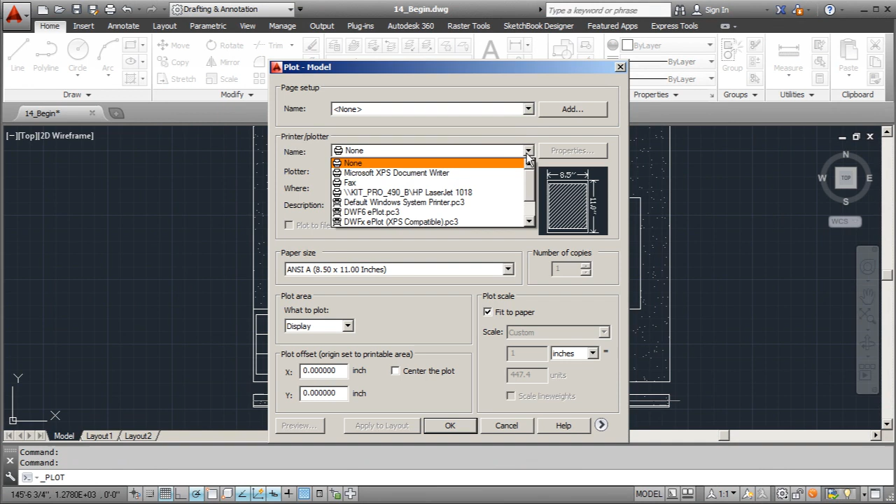So I could see I want to make a few adjustments here. I mean, some of the adjustments we've made so far, like darkening these lines, have been some really good decisions. Adding a little hatch pattern for our grass. But you could definitely now see the benefit of checking your drawings as you're going, so you know what it's going to look like as a finished product, and you're not going to have any surprises once you hit that print button. So what I'd like to do is darken up these dimensions.

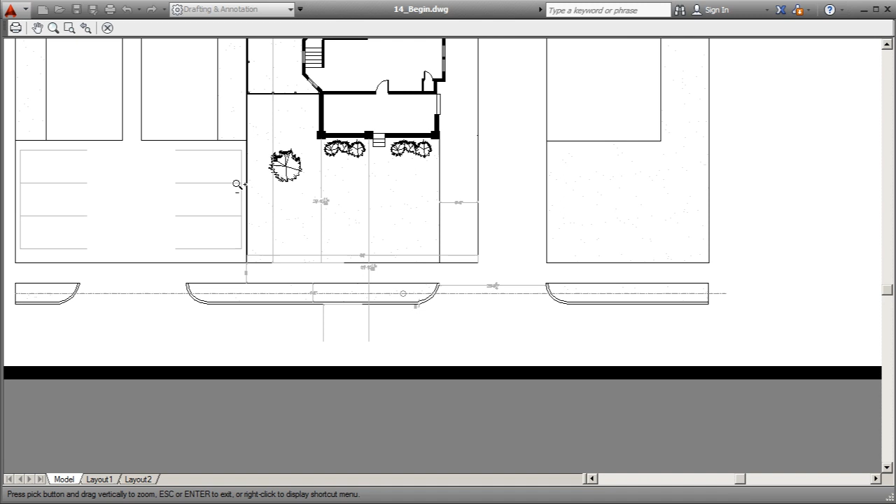The dimensions are very important. They're going to tell a story. They're going to tell everything that we need to know that's going to be really important about our project. So we're going to do the same thing for our parking stripes. So anything that's gray, I can see that gray color really isn't working too well and it's not going to read. So I'm going to go with darker lines, but I am going to be very careful to manage my line weights accordingly. So let's get that accomplished.

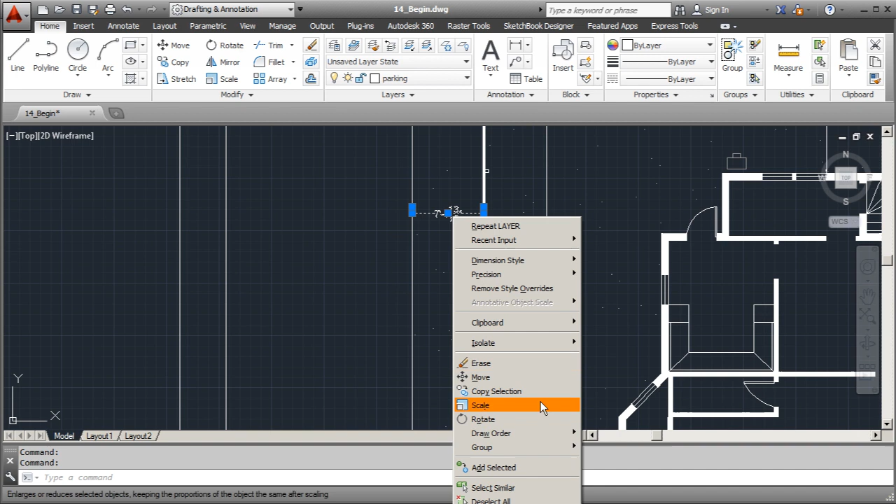Let's jump out of this. And I'm going to add a layer strictly for my dimensions really quick. So we'll add layer. We'll go dimensions. And I'm going to keep it white. And we'll say there. Bingo. And now I'm going to select one of my dimensions, and I'll right-click, and I'm going to select similar. I should select all my dimensions, and I'm going to go to my drop-down, and now let's assign those to that layer there. So it looks like, as I mentioned, we can make some more adjustments.

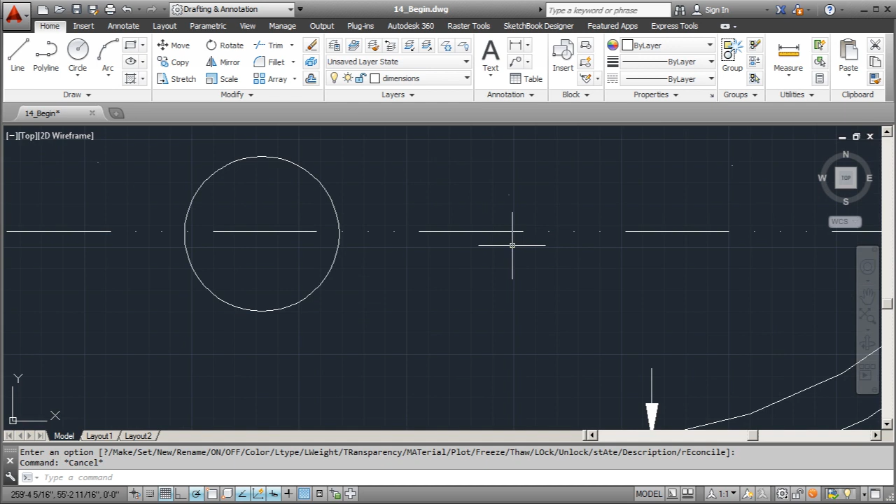So let's adjust what's going on with these guys. So that's my water main. So we'll come in here, and we'll assign that to the white color. Looks like it took care of that as well. And we'll do the same thing up here towards the back, because we definitely want all this to be very visible. We don't want any question about what's going on in the back. So I'm going to select that's going to be my sewer main. We'll set that one back to white color as well.

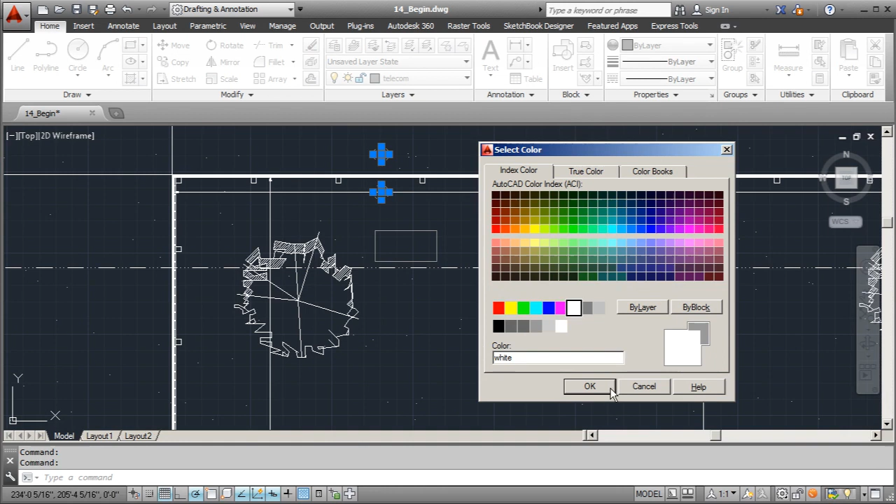And we'll do the manhole cover. And then, oops, don't want to do the 255. It'll actually show up almost like a gray color. We'll do these last few utilities here. Actually, we can go down this way. We'll assign white to it. Perfect. And we'll get our one here. I always do that. Let's go back to our drop down and take care of that one. So assign white to that as well.

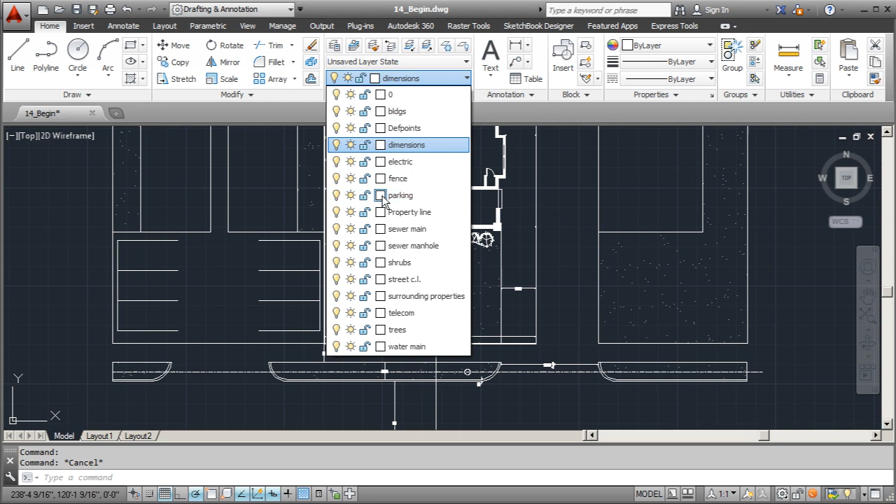So now I should be able to go to my plot preview, take a look at what we did, and things should read a lot better. I'll do the same thing for my parking stripes here. Let's adjust that layer. I think that's on a 255 color, and that'll show up, yeah, as a grayish color. So what we'll do is we'll go straight white. Now we can do our plot preview, print preview.

And we'll see how this looks. Oh, that looks a lot better. Reads a lot better, too. There's no question on the dimensions. All right, I'm glad we made those changes. Now, you can definitely see the benefit of checking your drawing as you go.

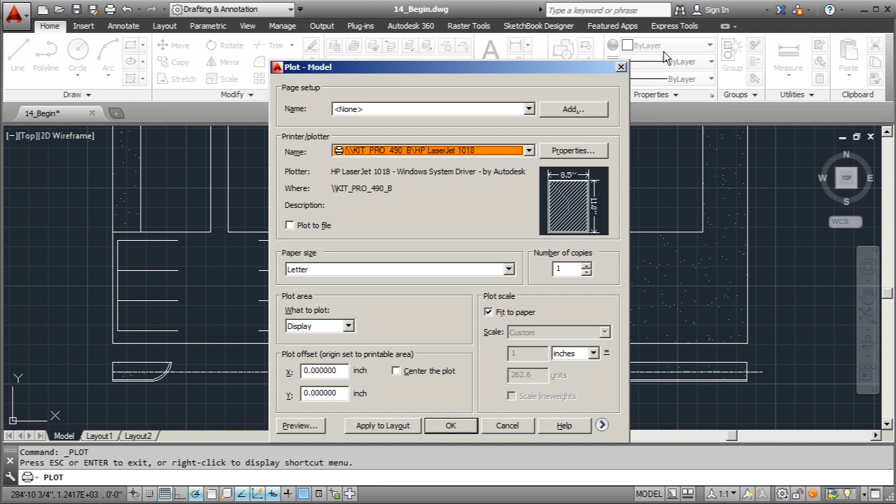So let's add some text to this. So what we're going to do is we're going to use multi-leader text, and we're going to call out all our utilities and any kind of notes. We could probably even, if you wanted to, call out the type of trees you got there. You can make note driveway.

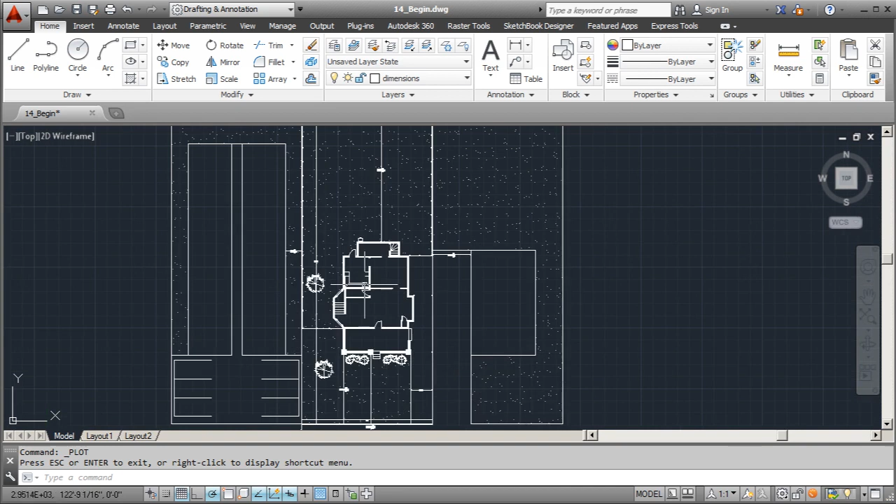If you wanted to, you could put maybe the address in each one of these blocks or the name of the building, depending on the type of project. You could even put your legal description somewhere in your drawing if you wanted to. But I'll probably do that in the title block. But let's go ahead and add some text.

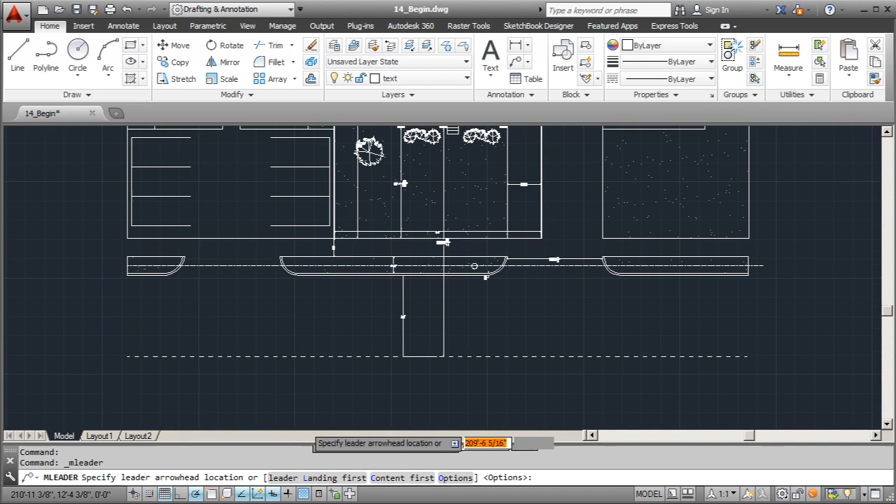So I'm going to create a layer strictly for text. So we'll go there, we'll add layer, and we'll call this one text. We'll make it current, and we'll start with our first one. And I'm going to start here with my street center line. So basically I'm going to click on that guy, and I'm going to type in CL of street, center line of street.

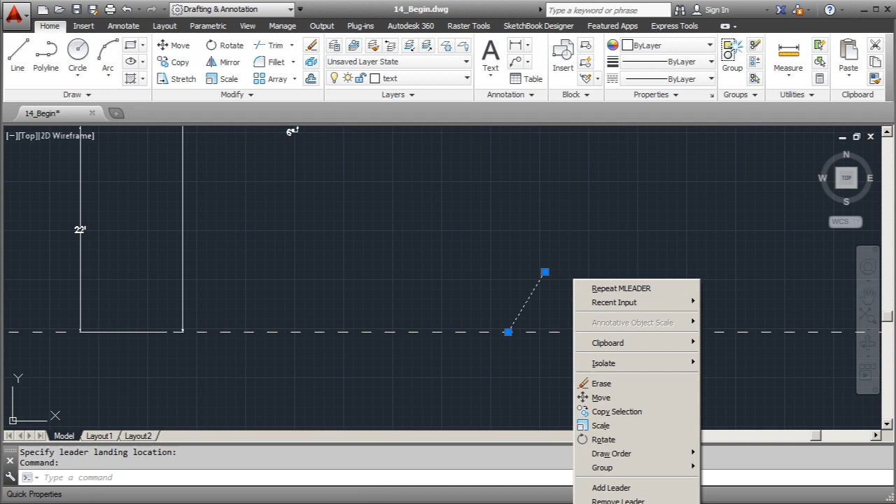And it looked like it disappeared, but it didn't. I just need to adjust some issues with it. So I'm going to right click. Now you can either go to quick properties or properties. Quick properties will bring up a smaller window, but it doesn't have all the information we're going to need. So I'm going to go to the regular properties.

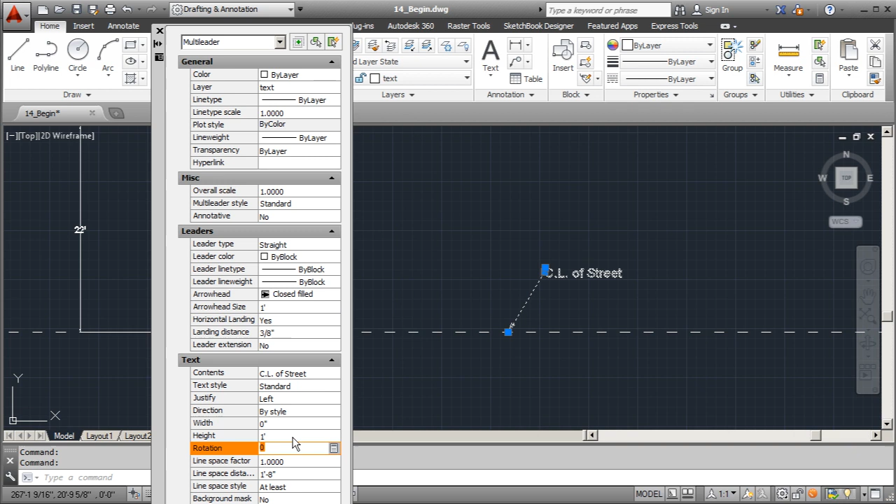And we want to adjust our arrowhead size to about 1 foot. And you can see that change made right there. And I also want to change my height for my text to 1 foot as well. And that looks a lot better. So all I need to do is get out of this window. I'll hit escape once, and you can see that that reads nicely.

So now we're going to take a similar approach, but first we're going to create this as an actual style. So I'm going to select it. I'll right click, and I'm going to go to multi-leader style, but I'm going to save as a multi-leader style, and I'm going to call this one site plan. And we'll say OK. And now I can just use that one when I do anything else.

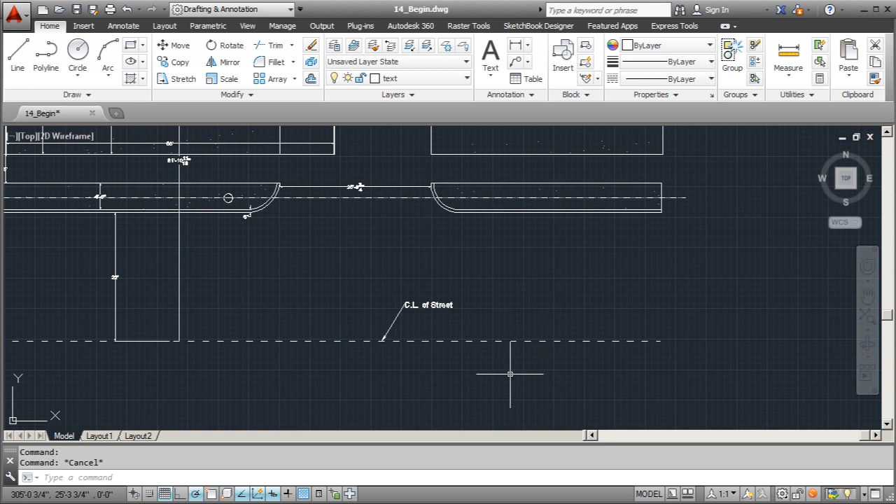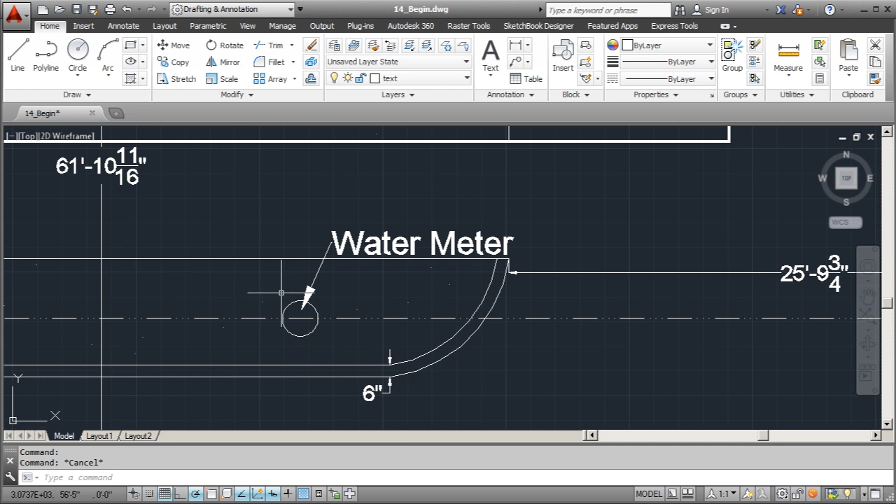So we'll come over here and we'll use another multi-leader. I'll point here and I'll say water meter. Hit enter. Click out of there. It looks like it's small, but it's not. We'll right click, we'll go to multi-leader style, and my site plan should be there, and bingo. That's all we got to do to add text. So let's add a couple more here.

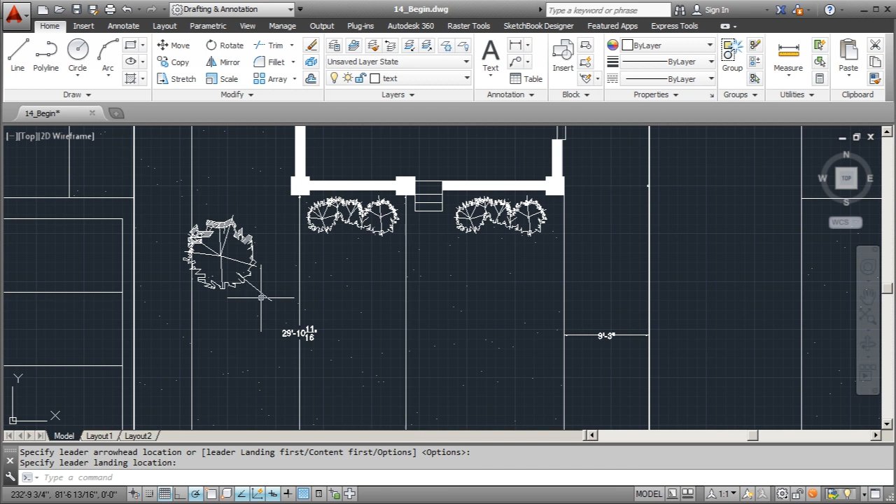We can simply start labeling our trees and shrubbery if we wanted to. You can do that for your landscape. So we'll do the same thing. We'll go multi-leader, come here, and I'll say deciduous tree. We'll capitalize that T. There we go. I'll select it, right click, and we'll go to multi-leader style, site plan, and boom. Perfect. So that's basically how we're going to add text all throughout this thing.

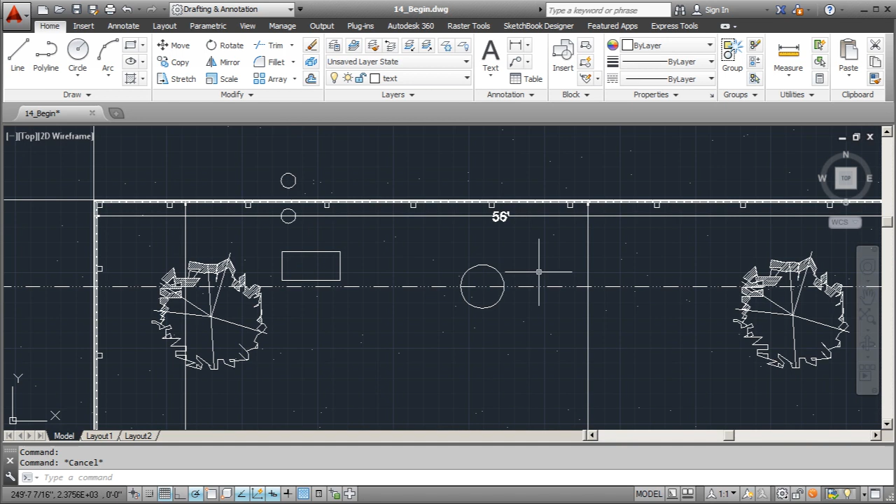And I'm going to basically add text everywhere I need to, especially up here. I'll be adding text so we know that this is our telecom poles, that this is my electric transformer, sewage line, and what have you. So to finish out this lesson, I'll go ahead and add this text. But in the next lesson, you'll notice the text will all be there, and I'll show you a few finishing touches we can add to finish off our project.